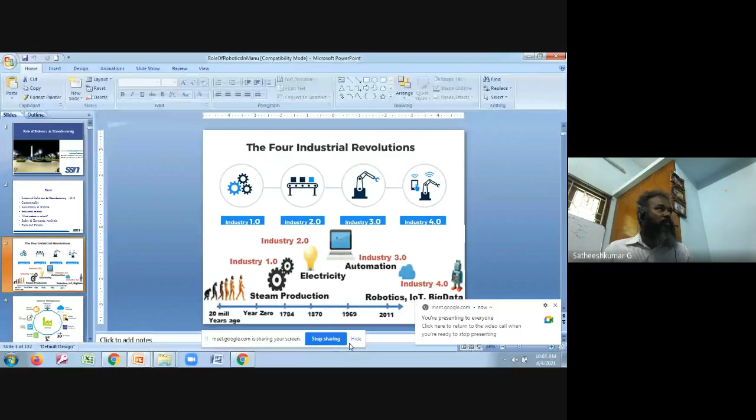Excuse me sir, the screen is not shared, sir. Your screen - is it? I thought I was already sharing. Fine then, share. So it says I cannot share. Just a moment, I'll stop sharing and restart my entire screen sharing. Share. Is my screen visible now? Yeah, it's rotating, sir. Yes, okay. How about now? Yeah, now it's okay, sir. Probably I'll just give it a second. Yes, now okay, sir. Press the hide toolbar button, sir. Press the hide button. Yep, okay, done.

So this is the picturesque location of SSN. Thank you, sir. So this is the flow: future of robotics and manufacturing with respect to Industry 4.0, current reality, automation and robotics, industrial robots, what makes a robot, safety and economic analysis, facts and fiction.

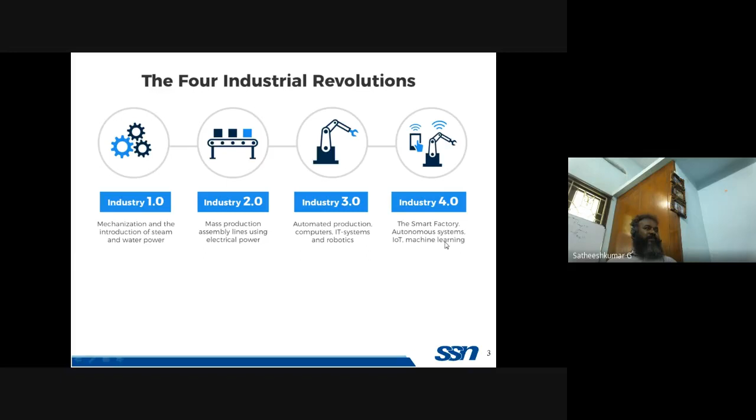Industry 4.0 is the fourth stage of the industrial revolution, which started approximately 200-300 years ago. Starting with steam power, then we moved on to electric power, then powered by electronics and computers, and now we are at the stage where the internet plays a role in everyone's survival. That is where Industry 4.0 comes in - IoT, robotics, big data are going to have a real showtime for these domains.

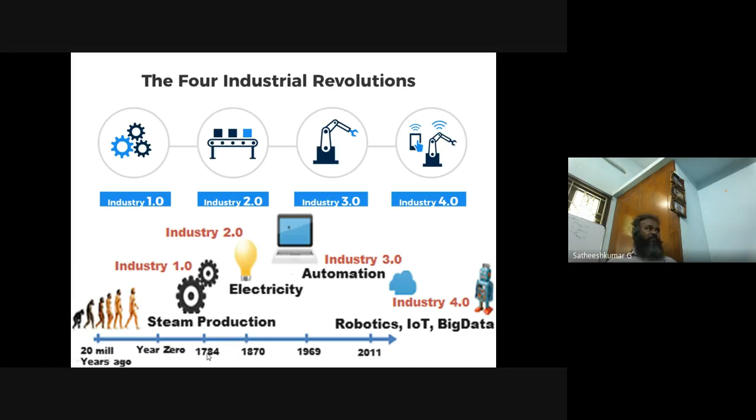It all started like this - it might even have started before that, but at least 1784 could be considered the starting point of the industrial revolution as it is, and it is extending further beyond now.

So there can be all kinds of robots. It is decided by the operating environment and the locomotion capability of the robot.

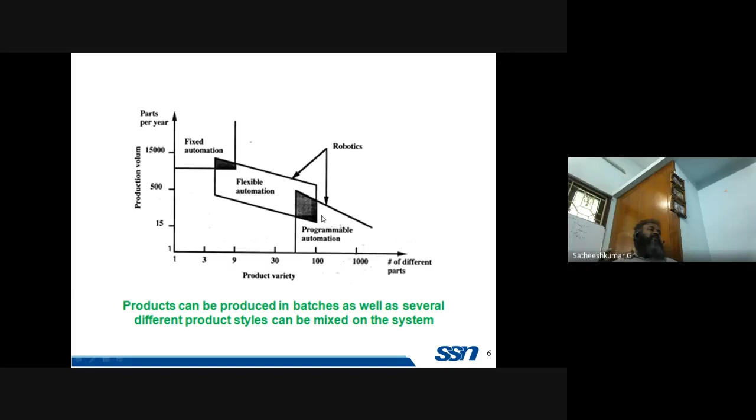So that is how it was, robotics was playing a role. And nowadays, this particular robots which played a role in these domains, called industrial robots, have almost reached a point where it is saturated. It can be called a saturation limit it has reached.

So this automation, the one that I presented in the earlier slide, will have a hierarchy. There will be a real-time application where you'll have controls at PLC level, field level, small machines and components working on its own. Then process level control will be there, plant level control will be there, and finally enterprise level control, ERP they say, right? On top, a complete company being run from one point.

So even PLC and SCADA will come and fit at this level. Sometimes an extension of that can fit at ERP level also, SAP and other things come at ERP level. So this is like one after other. If there is some failure here, this and this will be completely disconnected.

So instead, if you apply Industry 4.0 technologies, you will have a networked system of hierarchy. There is no hierarchy, in fact, everything is connected to the other. So this is like cyber physical system based automation, CPS based automation.

Cyber is like the virtual world of internet or through internet. It can be through any other way also. Cyber is like the virtual world, P is the physical world. So this physical world is converted into data representation and converted into a cyber physical environment.

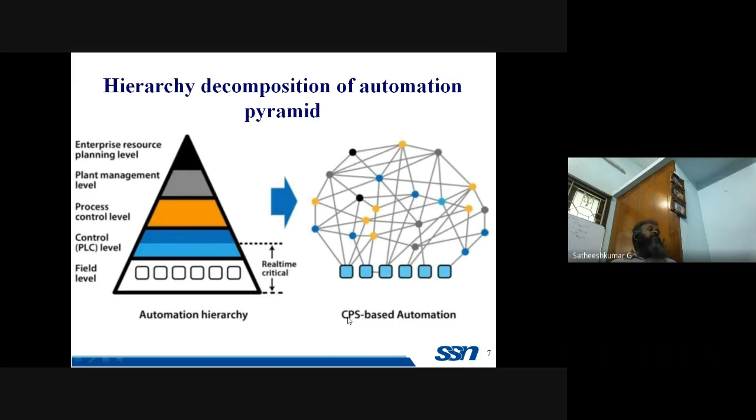If there is a machine that you have in your environment, for example, going to fabricate or work with a robot, all this working of the machine with the robot, everything will be transmitted and stored in the cloud. And all the information stored there, data stored there, will be the cyber physical system.

The machine might be working here, but equivalent to that, the cyber physical machine will be working in the cloud computing system. Physically it will be here, virtually that machine will exist there. That is how the technology has progressed. All the experiments that you wish to do here can be experimented there virtually. So you don't have to run the machine at all. Just by running the data, simulating the data, you will know whether this will work or not. Technology is developing to that stage.

Of course, it has not reached the zenith of Industry 4.0. We are right now at the starting point of Industry 4.0.

One more thing is IoT, Internet of Things. The definition of Internet of Things keeps upgrading every 2 to 3 years. For example, what is mass? That definition changed after some 200 years - after Newton and Einstein the definition of mass, they say it was relative, but still mass holds its own definition. But the definition of Internet of Things keeps upgrading every third year. That is the kind of change that we should be ready to sustain.

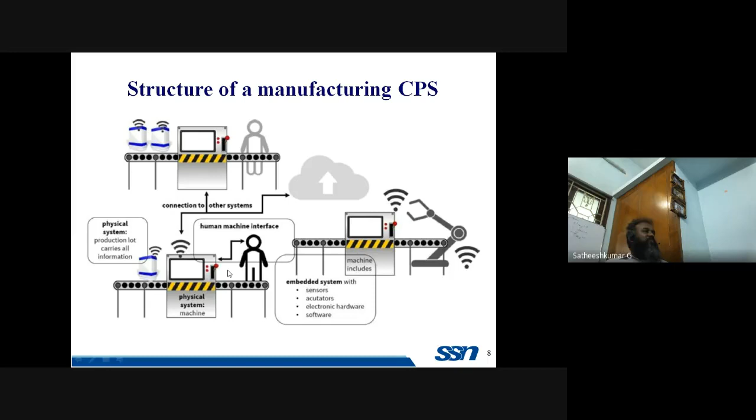That is like an embedded system. This is also a physical system - it is not like something out of the box. It's a physical system, but specific intelligence is there, some onboard intelligence. These other things need not have intelligence - this could be like some press button that you press and it is going to work, you switch it off and it is going to switch off. So all these things put together is the cyber physical system.

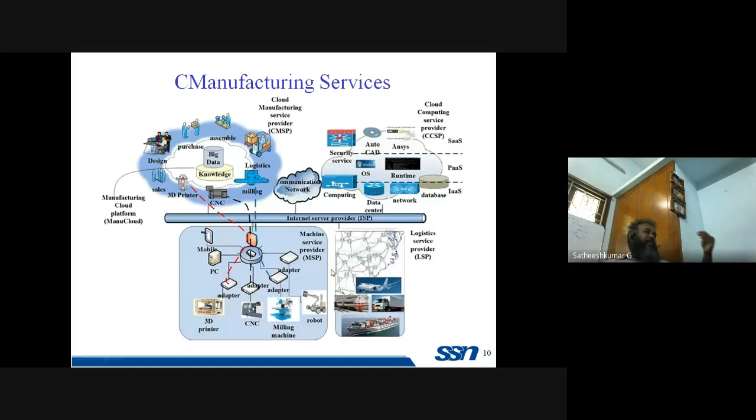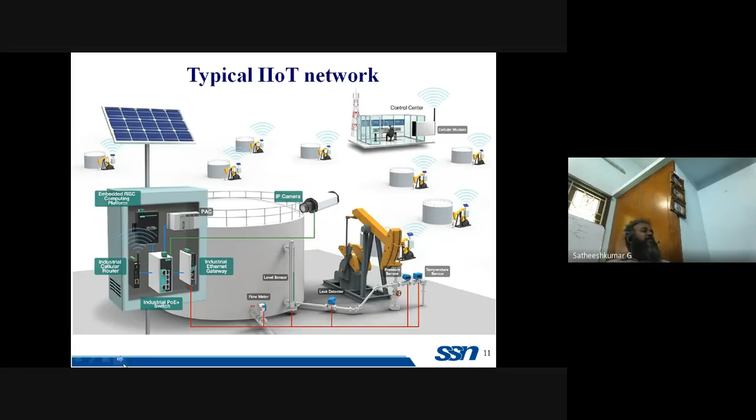Similarly, for a manufacturing company, you should have industrial communication among the components which are there. There could be a robot, an environmental controller controlling the air conditioning system, or a machine vision system that controls the motion of objects between different places and machines. And there is a CNC machine, a PLC is there to control all these things. All these things will be communicating to the cloud through the gateway.

And there could be edge computing also. Everything need not be done at the cloud. There can be some edge computing. Edge computing is like a pen drive I insert into my laptop, and whatever can be done at the cloud computing level up to a certain extent, I can do within the pen drive. It is not a pen drive, it has processing power. So such devices are called edge computing.

So this is like one small unit, a manufacturing unit. Virtually, in real time, this will be there. So this, again, with relation to cloud computing, becomes a cloud manufacturing unit at the smallest scale. Whatever I showed in the earlier slide is the largest scale.

And of course, what are all the research gaps for engineers to fill? Mechanical engineers, manufacturing engineers will be talking about FMS, which is a little advanced than CIM, computer integrated manufacturing. And even better will be reconfigurable manufacturing system. Automation assembly line was the starting point where we started seeing intelligence being applied.

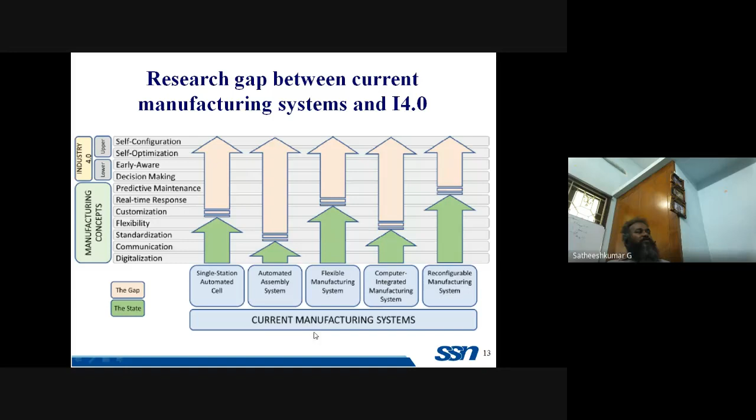So much is the research gap here if you have to reach Industry 4.0. So what are all the things that you have to cover? Self configuration, optimization, awareness, decision making, predictive maintenance, real-time response, all these things. Flexibility, of course, we got it into here and here, which was not there in CIM. So such gaps are also presented. This was also taken from the review paper, this particular slide as well.

So what are all the domains specific to simulation research? Simulation itself, like we knew CAD software, we simulate something. There are some simulation software where you create a cartoon and make it work.

Such kind of simulation for manufacturing applications is going to play a very wide, vast, in-depth role in the future. VR, virtual reality, AR, augmented reality, MR, and so all those things will have a very prominent role in the future.

For example, ergonomics will have proper simulation tools. There is a wide vacuum here. So many things can be created. Similarly, process design, verification, planning - so much can be contributed.

Of course, there are good softwares available for simulation, but to integrate, they are still developing. This is a very huge domain for individuals to work on. Say material flow, robotics, it is a very fertile field, product design. All these things will have simulation as one end of it.

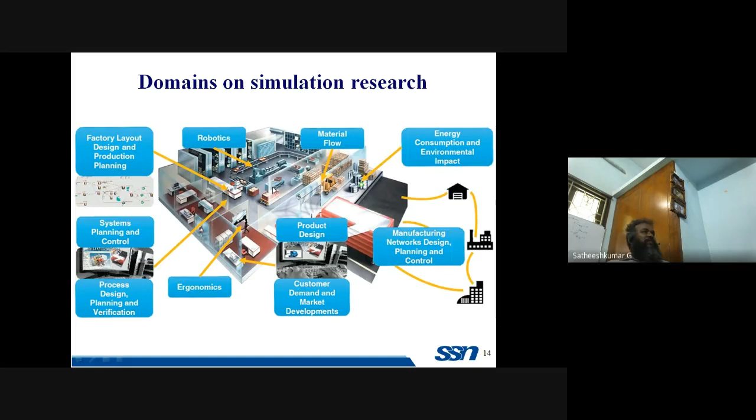You might say it is just energy consumption, man. Yes, I need a software because virtually I want to check before I start running the manufacturing unit. I want to virtually check by running this particular plant, what will be the energy consumption, what is the environmental impact, and so on and so forth. So this knowledge into these domains is very much needed, very, very much needed.

So specific to augmented reality, say you need something for training. If there is an AR developed for training, it will be helpful for job specific training, safety and security training. You can have expert level coaching. All these three domains, your life will be made easier if you have an augmented reality simulation.

And similarly for sales, you can have product display like in the form of a virtual twin. They say digital twin, right? So digital twin is like I have a computer or an Alexa like product, your mobile, there will be a digital equivalent of that. Every programming aspect, every usage aspect that I interact with my mobile, my digital twin, my mobile's digital twin will be able to replicate as it is in the form of say virtual motion.

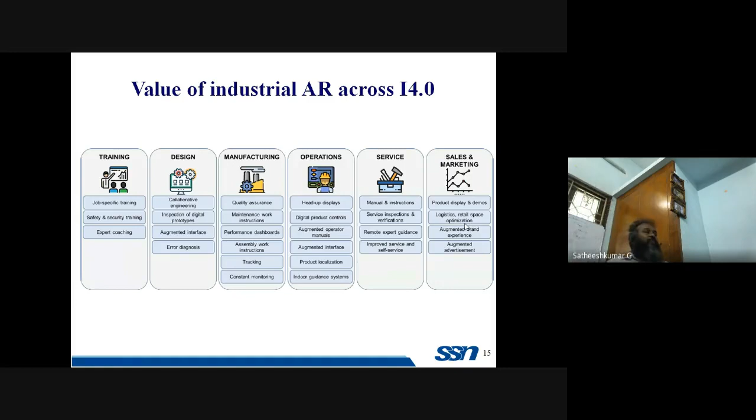So when I connect augmented reality to that, I will have an equivalent mobile, say on the hand. I can have two mobiles, one on my hand and one on my virtual augmented reality tool. Through my mobile or my laptop I can create one more mobile virtually. So such kind of things are possible.

I need not talk now, because the data that you generate is the lifeline for the cloud manufacturing unit or Industry 4.0. So data is the lifeline. If you remove data, everything will fall like a 9-pin. You won't have anything standing. Maybe our robots and machines might stand, but everything else will collapse to the ground. So data is the lifeline. They are going to present their data life cycle in this.

I think I've spoken a little more than 25 minutes, so I'll just move on. I just spoke about the future. This is how it might appear. Everything will be connected through the internet, everything will be connected through the internet. So this GIF is depicting that.

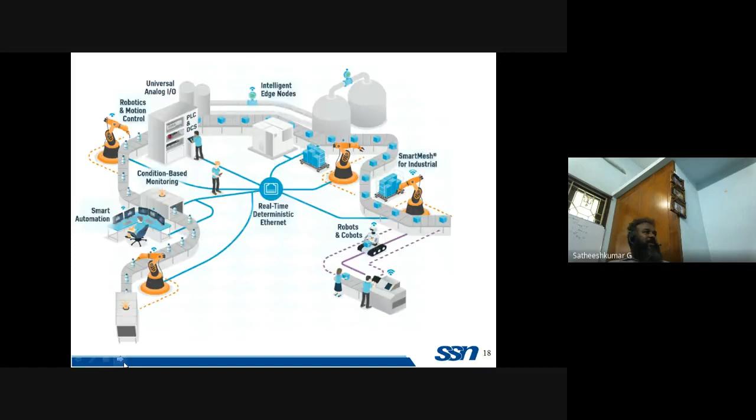Any guesses? Sir, connection, communication, and maybe all the data to be shared to cloud, etc. Okay, so let us assume, as you said rightly, since I've called it smart, even that communication is there - so between here and here, everything is connected.

Let us assume. What else is missing, Kana? Go one step ahead, what you said is right, that is the first thing. The people. Precisely, that is what I wanted to ask. So smart cities need smart people - if you have a smart city, you need the base, the foundation, as smart people.

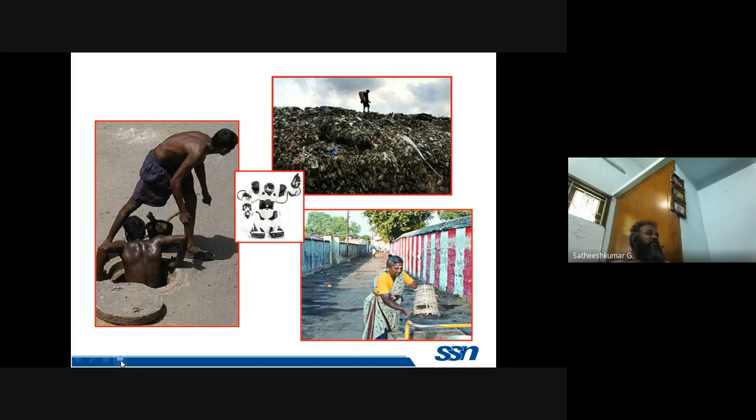So I say apply any technology - I'm talking about robotics, so apply robotics technologies to solve this problem. So technology, some people will say it is good, some people will say it is bad. We are all technologists, so we cannot say be on the other side, but nevertheless we will say technology is both good and bad. That at least we can say, right?

So all these things are helping me do that. We use this almost every day, right? All these things I use - watch, communication, mobile, buildings, such huge buildings, internet, computer, everything I keep using, electric power, bicycle, eyes, everything I use. So this is like a knife, a technology. I can use it to cut apples or poke it into someone else's eyes. So humans decide whether this is good or bad.

So what is this, Kana? What is this? Probably it might look too small for you guys. Can anyone by chance realize what this is? Okay, not a problem, I'll come back to it.

So which among these things came first - three things - stone or fire or wheel? Is it stone, sir? So it is stone, then fire, then wheels, and it's like a never-ending spiral of technologies we have been bombarded with.

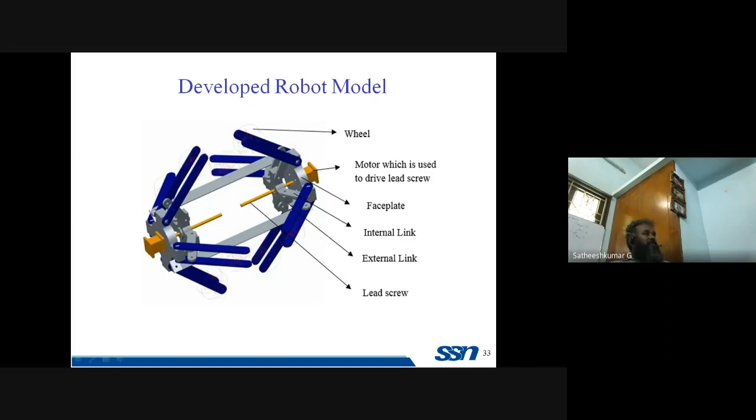There are places where 2.5 meter diameter pipelines are also there, but this is not meant for that. This is specific to Chennai pipelines, underground sewage pipelines. So this design, and all the software analysis that we did, I want to talk about.

Robotics and manufacturing, the role I'm supposed to talk about - that particular robot which plays a role in manufacturing, how it is designed, is what the next 2 or 3 slides will cover. So physically, I told you how I manufactured it.

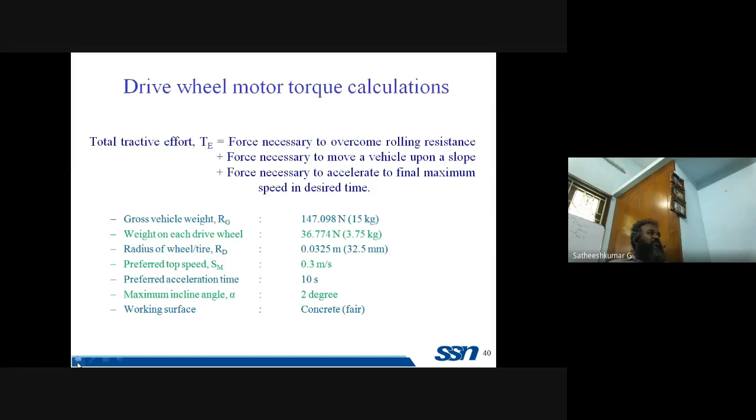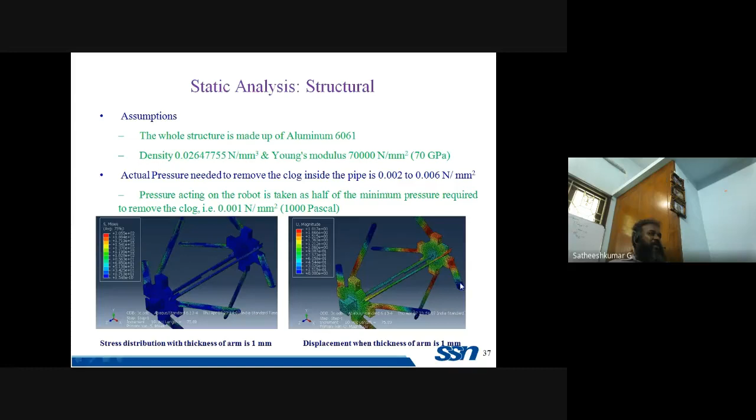I did some static load analysis, I saw stress, strain and displacement. I increased the thickness of this plate and measured again and again. That is the advantage these softwares give - structural analysis.

Having done that, I moved on to kinematic analysis. The robot is ready, so suppose if I want to move this particular wheel from here to here, what is the number of rotations that the motor I mount here will need, for this robot's end position to reach from here to here. Similarly here to here - there are 8 wheels on top on all the sides. For that I need kinematic analysis.

Kinematic analysis of the robot is to be done. For this industrial robot to move from here to here, I need to find the instantaneous position, given as X, Y and Z in space. That will be related to the joint positions - theta 1, theta 2, theta 3 - and this vertical axis also will rotate like this, so theta 4, 4 different rotations. When I combine them, I get a motion from here to here.

Such a complex mathematical model is running in the background, for one robot. For that, I'll be fixing these kinds of coordinates onto the end effector, onto the joints, because joints are the places where the motors will be fixed, the endpoints of the motors will be fixed.

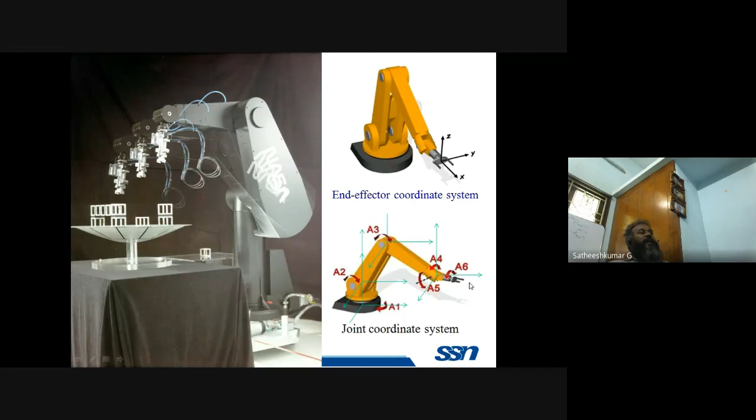So from here to here, what is the transformation? From here to here, what is the transformation? From this coordinate to this coordinate, what is the transformation? I'll find from one coordinate to the next, and so on and so forth, and finally I'll know from the base coordinate where the tool center point coordinate is. I can move it mathematically - that is the advantage of kinematics.

So within the robots I was talking about, the robot is not going to work alone. There will be a work environment where a work table is there, say an object is kept. So there is a coordinate system. The robot should know the object with respect to the table, this object with respect to the base, and this robot with respect to the world coordinate system. Now if one more robot is there, it should know that with respect to this room's corner point, I am here, and that other robot is here, so I'm not going to hit it. Such kind of complex relationship exists between these robots and the environment, and that has to be resolved for solving one robot's problem.

For example, say this robot, I can rotate it. I draw a line here and I can roll it, like I'm holding an object in my arm, rolling it, twisting it. But when I rotate it upwards, this entire arm rotates upwards, and I can roll it here too. But what happens is at the base also, this base was helping me roll it initially in a different, vertical direction. So that rolling was happening in one direction, and this rolling was happening in a different direction. But when I keep it in the same axis, both rolling motions get converted into one rolling motion.

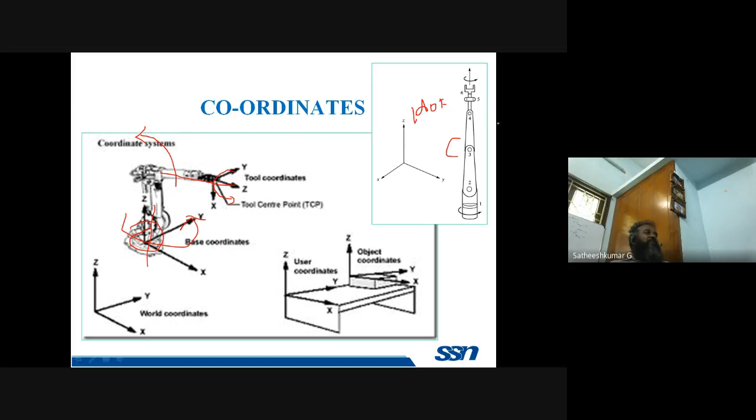So the robot loses 1 degree of freedom. What is the big deal about losing 1 degree of freedom? It might just be doing the same job, you might say, but mathematically, there will be a bomb dropped into the kinematic equation. The equation might be completely demolished, it will be confused, and your robot might start acting weird. It might go hit other things, hit the bottom, or throw whatever it is holding. Such is the complexity. This kind of losing or gaining 1 degree of freedom affects the robot kinematics, the working of a robot. That is called a singular configuration.

That also you can find out mathematically. An analysis called Jacobian analysis is there, with which you can predict, even before reaching the point, that if I go there, there will be a singular point waiting for me. So avoid that path, and your kinematics will take care of moving through a different path. That is the kind of analysis kinematic analysis gives.

For every robot in the industry, such kind of analysis is done, and that mathematics will be loaded in the controller. Here is the controller, a box which will have so many electronic components. For each motor you need a driver, and all those things will be fixed there, and power supply has to be converted. If it is an electric motor, it comes through this and comes here. If it is hydraulics, it comes through this and comes here. If it is pneumatic, accordingly different motor drivers will be placed here.

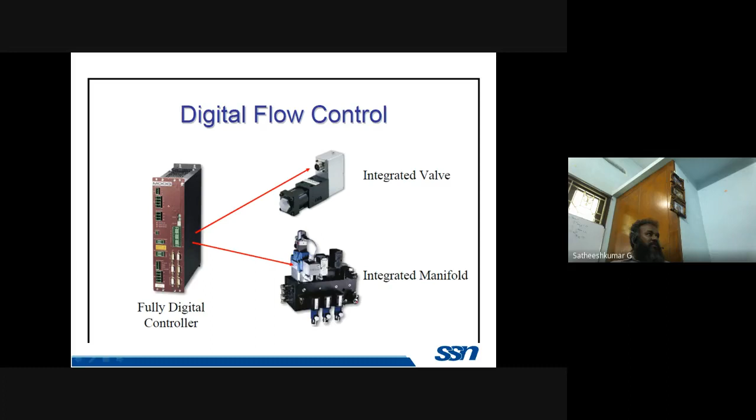And you have a teach pendant also to program a robot. So these kind of devices will be there in the control unit, for controlling, this is like a fully digital controller. These kind of components will be there inside, and for each motor such components will be there, stacked inside, one for each motor, and so on. There might be a number of sensors here that also will be controlled by this, and there will be other things like beep sound, light, and so on, all controlled here.

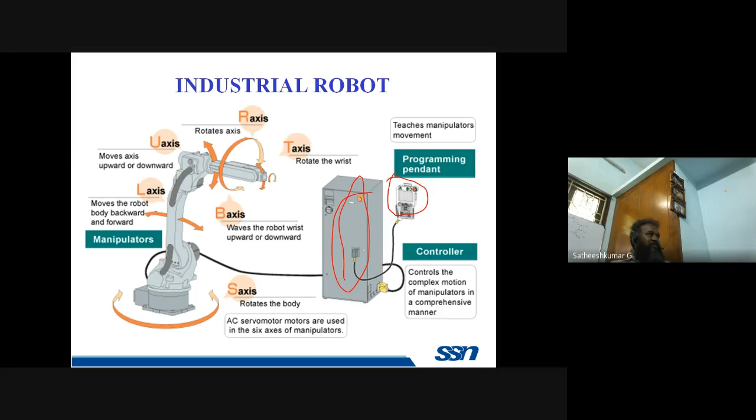That controller algorithm, the kinematics algorithm I mentioned, will be entered here, taking the kinematics algorithm. So suppose if I have a robot which has 1 wheel and 2 wheels, balancing on 2 wheels, it can tilt forward and backward.

Without falling, it should move forward and backward like an inverted pendulum. So if it is going to fall this way, I mount a sensor from the vertical to find out what the angle is, an inclinometer or some other angle measuring sensor. Based on that, I will say move the vehicle, move the wheels forward, that kind of algorithm will go here. If it is going backward, move the wheels backward, that is controller algorithm. Here, kinematics algorithm will be there. Kinematics is like if there is an arm like this, how much this side should move and how much this angle I should move.

Both the angles I should move to for this arm to move from here to here - that's where the kinematics algorithm comes in. I'll take feedback and do the error correction and control it. So this is what goes into a controller, all these things will go into a controller.

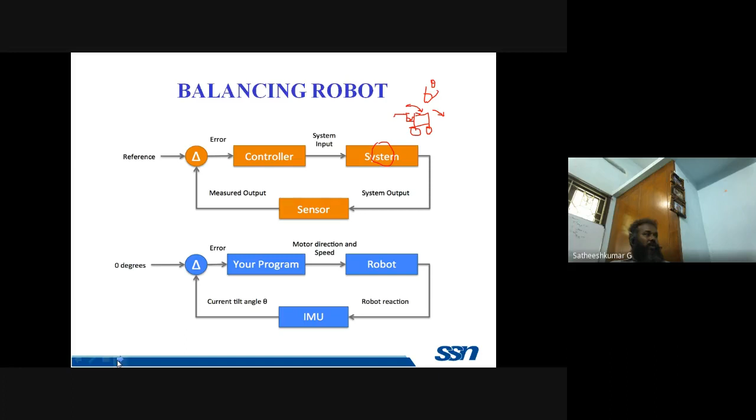So that way, different configurations of control architecture are possible. For my sewage cleaning robot, this was the control architecture. I cannot discuss any further on this.

It's 10:45. Okay, good. So we have gained some time now.

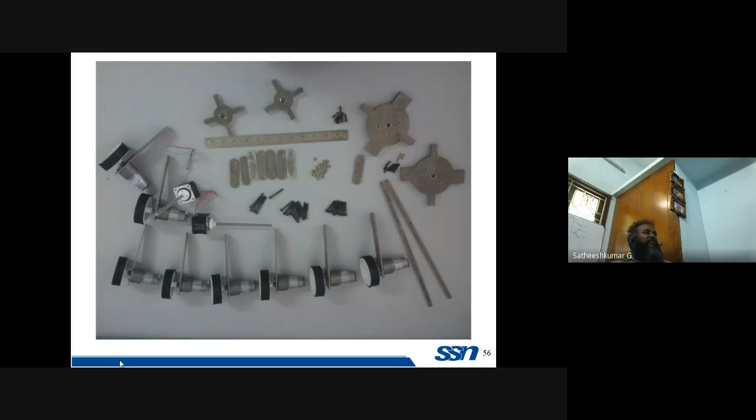So these are all the studies that we did and the fabricated components for that sewage cleaning robot, and the assembled one. The idea is, in Chennai there is some 7,000 kilometer network of sewage pipeline under the ground, under Chennai alone.

Can you guess what 7,000 kilometers means? 2,000 kilometers is approximately the distance between Chennai and Delhi. So there's a 7,000 kilometer network of sewage pipelines beneath Chennai alone - you can imagine for the entire country. And over 77,000 manholes are there within Chennai.

So assume these circles as manholes. This is Chennai, and manhole to manhole, pipelines are connected. What happens is, whenever there can be a clog in the manholes or in the pipelines...

For manholes, they know how to take it out easily. Humans generally should not enter - they use the bucket machine. They just loosen the bucket inside, grab the filth from inside and throw it out. That way, the entire manhole, which is like 6 meters deep, 2 meters wide, can be cleared.

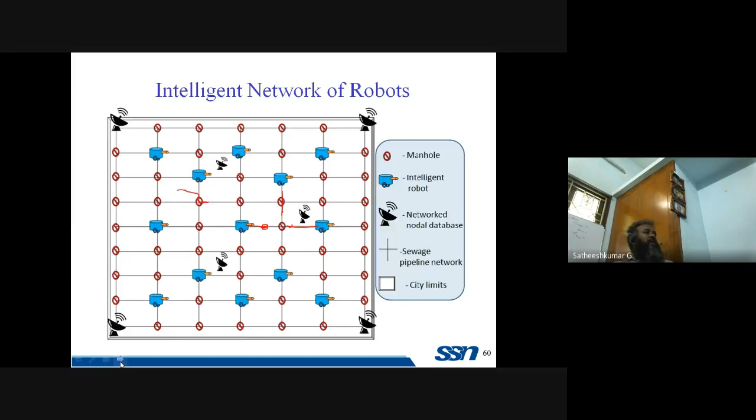And of course, there might be sensors mounted at these places, Internet of Things kind of sensors, which will also communicate to the robot - there is pressure developing here, come and check. So such kind of thing is what we are aiming at. We got funding from DST for some 40 lakhs, and we are working on developing a complete system.

So why - that is the question we should always answer. That is what education should do. So why robotics? I gave you the slide as an answer - the first slide which I mentioned.

And what is mechatronics? How are they different? Both are intelligent systems. What is the difference? Mechatronics and robotics are almost the same.

They are interdisciplinary subjects. How are they different? And what is this automation? How is it different? How are these three things different?

Okay, so mechatronics - let us say I create a device which will open and close my door. Here is my door. When I come and stand here in front of it, some sensor is there. It senses my arrival and just opens the door, then closes it. Only one arm is there, one small link is there. It just opens and closes, so that I need not call it a robot.

Okay, if I make a humanoid robot, and this robot walks and opens the door every time I come, every time I roll, then that is a robot.

Or if I take a complete arm and I'm fixing it to the wall, and using that to open and close, then it becomes partially a mechatronics project and partially a robotic project. Otherwise, everything is one and the same.

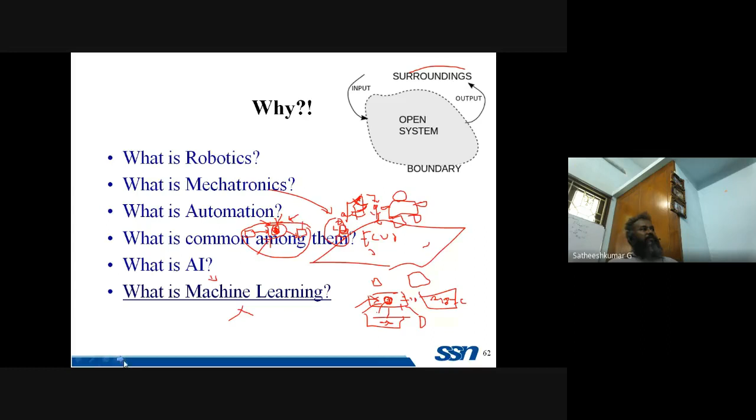Whoever is interested, you should start learning. It's better you start learning. It will be interesting once you know some basic C programming. You can learn Arduino programming also. You can control Pi and other softwares, and you can learn about artificial intelligence also. There are so many courses, free courses available, on NPTEL and so on. You can learn, or on the internet also. So you should learn, better to learn.

So all these things are examples for, say, a valve in the heart, your automated water vending machine, say valve in the heart. All those things are examples for mechatronics.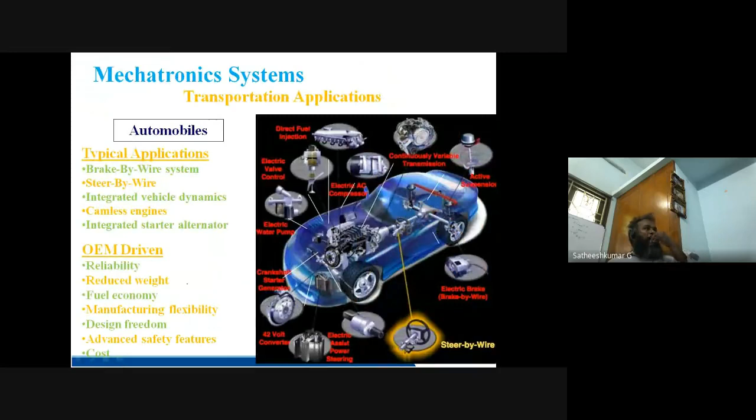So these cars I told you already, I gave this as an example. This is just one standard example which I keep giving. These are the components. Mirror opening and closing, there is a motor here. Window up and down motor is there, there is a button for that. Kick lock is there, locking this door. All those things are there. How am I connecting this wire?

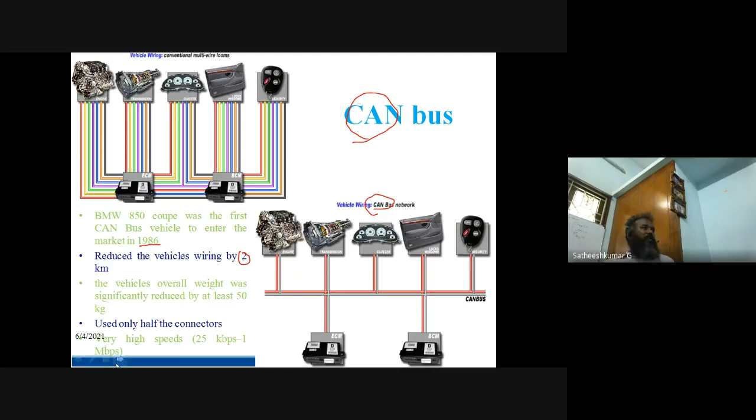That is done by some CAN bus controller, CAN bus protocol. So two protocols are there: this is like a conventional multi-wire protocol, and this is CAN bus protocol. All the same system connected, just by adopting CAN bus protocol in a particular car, BMW 850 Coupe, in 1986, the total wiring distance was reduced by 2 kilometers in each car, leading to 50 kilogram reduction in each car. So such is the advantage these kind of technology brings in.

Human beings, we are supposed to correct for 3 hours, some 25 sheets or 20 sheets. So when I reach somewhere around the 18th paper, my eyes will be almost half closed. I have to relax and come back to finish the rest. But these AIs and robots, they'll be working for years together, no rest, only mechanical wear and tear or some maintenance work. So these people gain advantage.

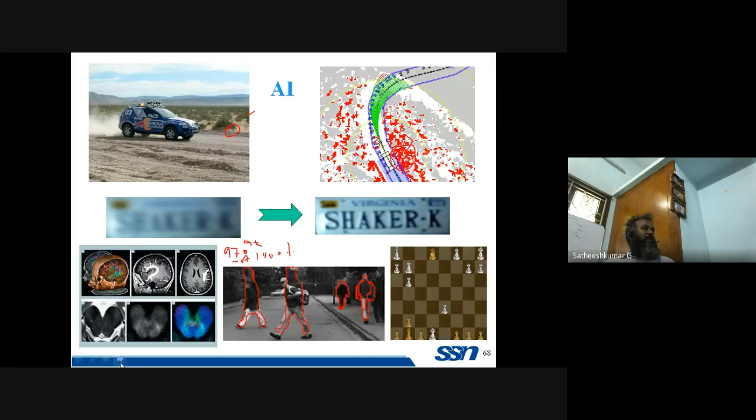Together they are getting 100. Man and AI working together. So what is the time? It's 11, half an hour more is there. Probably I'll just go through.

This is like you might have read it, Laws of Robotics, created by Isaac Asimov. He is considered to be the father of robotics by some researchers. In his collection of short stories, I, Robot, he proposed something called laws of robots. 3 laws he proposed, and a 0th law was added later.

It says a robot should not injure humanity. Similarly, a robot should not injure a human. A robot should obey human beings - that is the second law. And a robot should protect its own existence.

So now the condition comes: if a human commands the robot to hurt another human, that is in conflict. It should not injure a human, but it is also saying it should obey the orders given by a human - there will be a conflict. In that case, it says such orders should not be in conflict with the higher order law. So if both conditions apply, the higher order law prevails.

If both conditions apply, there is humanity on one side and one human on the other side - whom should I save? Go for humanity, this one prevails. So such is the kind of precedence that they are giving.

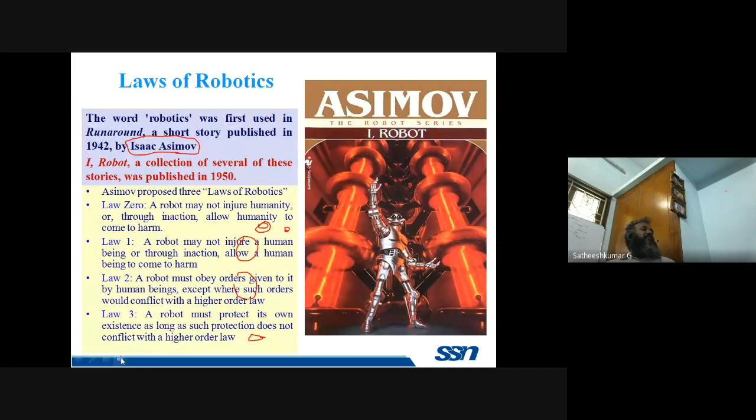So every robot, as I said, will have mechanical components, sensors, electronics, and the brain part also. Equivalent to motors, you have actuators in the robot. Equal to frames and links, you have the skeletal structure in human beings. Equal to sensors - suppose if you don't have a skeleton, can you assume your body shape? What will be the shape of your body?

Anyone can respond? Just wanted to hear it from you, how you guys think about it. If your skeletal system is not there, how will your body be? Our body won't be stiff - you'll be like an amoeba, a lumped mass of flesh.

If you had seen the movie Blob, B-L-O-B, it was a 1970s released movie, you can see such kind of things. It was a very interesting movie, in my childhood I've seen this. So think about like Aishwarya Rai or any model walking the ramp - if we had been created like this without a skeletal structure. Such is the importance of the skeletal structure that it offers for robots also.

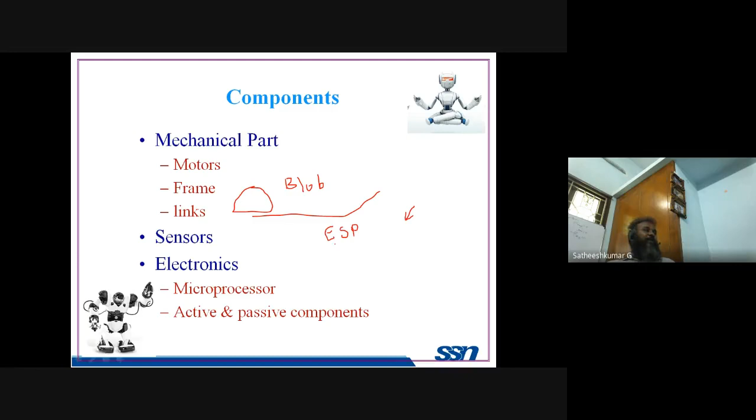Forget that - there are thousands and thousands of sensors available as an option for a robot. All the sensors you have to connect through electronics - resistor, capacitor, diodes and so on, transistors, so on and so forth. Even for running the motors, you need such kind of components.

The intelligence, you have to load it in the microcontroller and make it run. So there's microcontroller, microprocessor, supercomputer, and then PLCs, programmable logic controller, and even mainframes - all these things are equivalent to the brain. The microprocessor is there in your laptop, microwave oven, and washing machine.

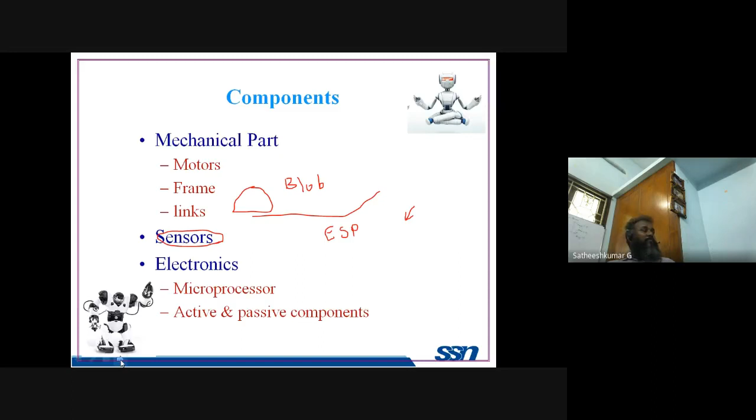Microprocessor is there in your laptop. Microcontroller is there in your microwave oven, washing machine, and so on. In your mobiles these days, it was microcontroller once. Now microprocessor is also taking its place.

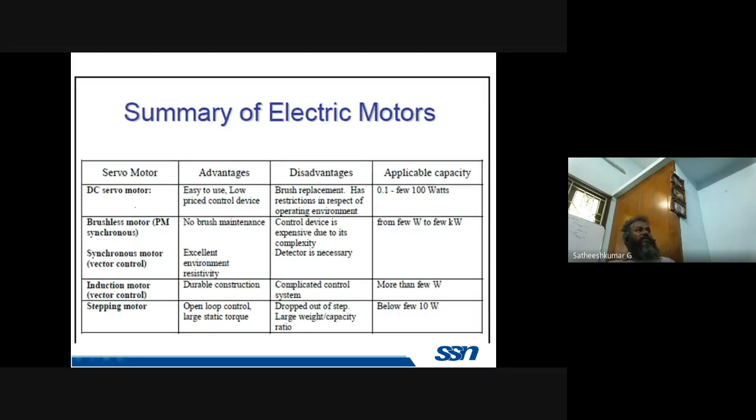So motors, probably I'll skip this part. Different types of motors are there. Electric motors are there, and pneumatic kind of actuations are possible, hydraulic kind of actuations. Long before, this was the scenario, most of the things were hydraulic.

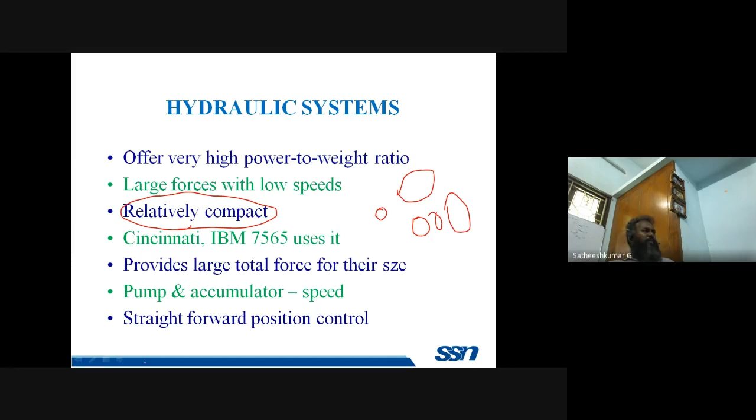Advantage with hydraulic is it will be very compact. If a large load is to be carried by a smaller motor, between hydraulic and electric motor, hydraulic will be much smaller compared to electric motor, and pneumatic will be a lot more, probably equivalent. So electric motor will be the largest, hydraulic the smallest for lifting a large load. Such high power to weight ratio is offered by hydraulic. Each will have its own advantage and disadvantage, and there will be a leaky environment.

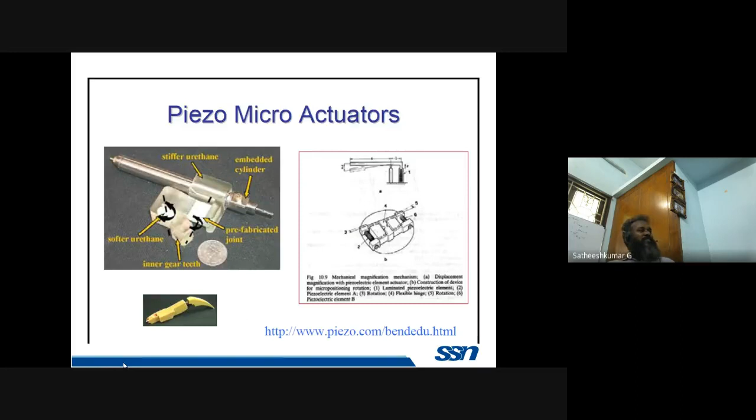So they brought both these things together, hydraulic, electro-hydraulic, and these days piezo, shape memory alloy, MEMS actuator, nano actuator, pico actuator, molecular actuator. I think then they might say electron level actuator, photon level, subatomic level. They'll keep going, there is no stop. String actuator, probably technology will go down that line. But as of now, we are here.

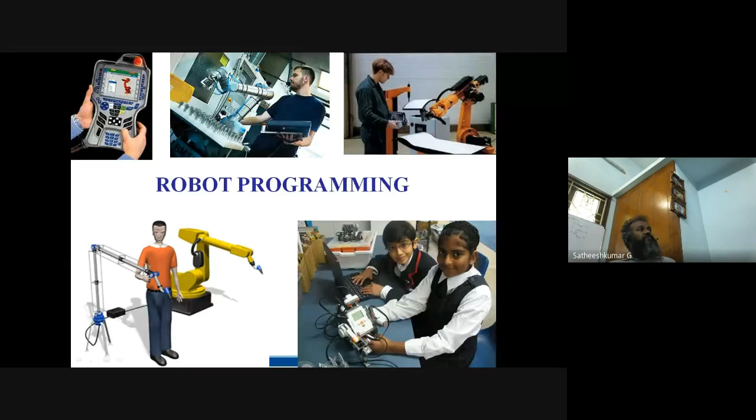Where robots are being used in the industry, manufacturing industry, and how they are programmed. Programming can be done by holding the robot like this. You can hold the robot, move it. If there is spray painting to be done, a painting to be done, you just move it with your own hand. You are an expert painter, so you know how to do it, and that will be automatically recorded.

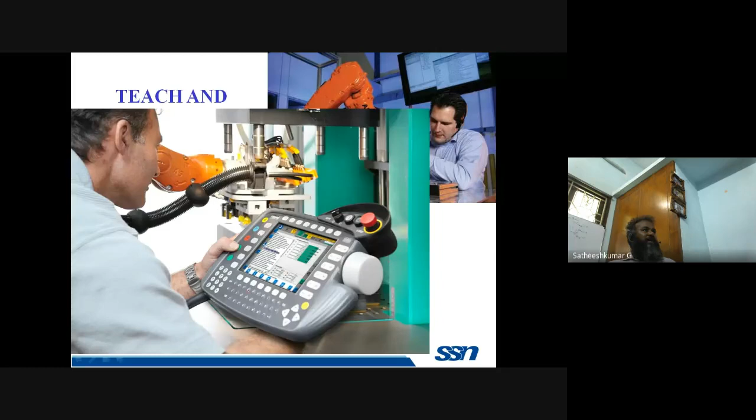Otherwise, you can even have a teach pendant, something like this, a button, a set of toggle switches and so on. With this you keep moving, and the robot will keep demonstrating as you move. So you want to move from here to here, you achieve that, and then save this program, run it 100 times. It will keep running from here to here. So this is teach pendant based programming.

There are computer softwares which are available. This is like a standard industry robot, ABB let us say. This ABB robot tool you can download from an internet library, and you can make changes here. Make it move from this point to this point, make a circle or a spiral, and that program will be saved. That program you can download directly into the real-time robot, and the robot will now start drawing a spiral trajectory.

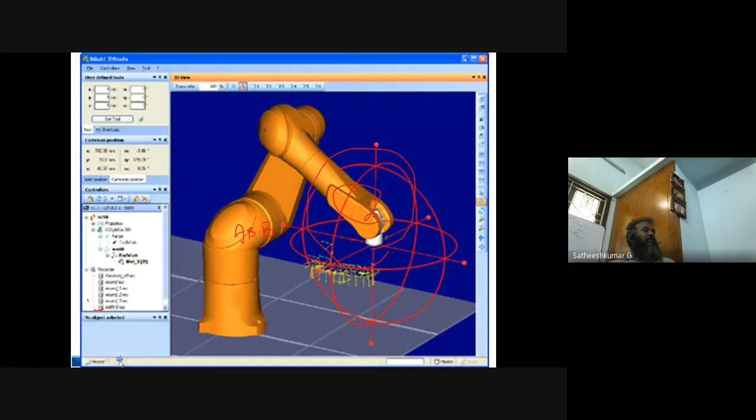These are called offline programming. All these things are possible for manufacturing applications. How about more than 2 robots? How about other machines working together in the industry? All those things are possible in offline programming and work cell simulations. So many very good tools are there. All these things can be put together and made to work in tandem.

In work cells, there will be proper sensors. If humans enter, it will be immediately sensed, and the robot will be switched off. There will be electrical fencing like this, you can see fencing here, and fencing here also. Neither the robot should cross this line, nor should a human cross this line when the robot is in operation. Such kind of advanced training is there.

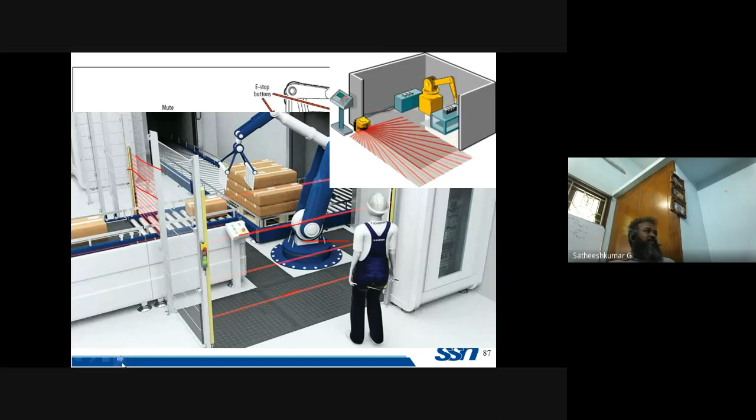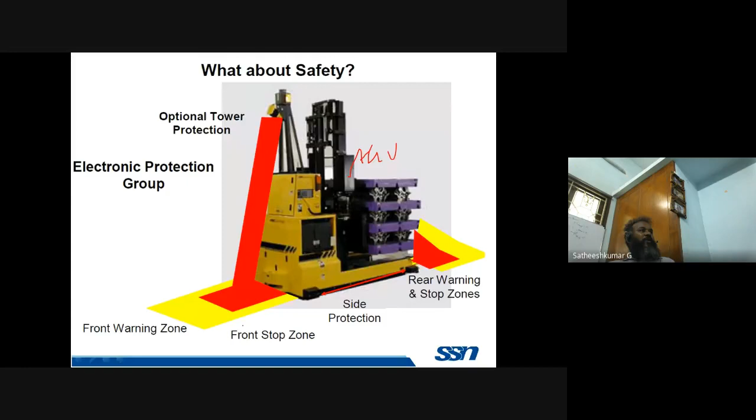Even for the individual units, AGV also has so many sensory parts on it. Front warning zone, rear warning zone, and there is a tower on top, a watch tower. Audible signal is there, flash signal is there, physical protective bar is also there, bumper-like thing is there, and all those things are coordinated on its own.

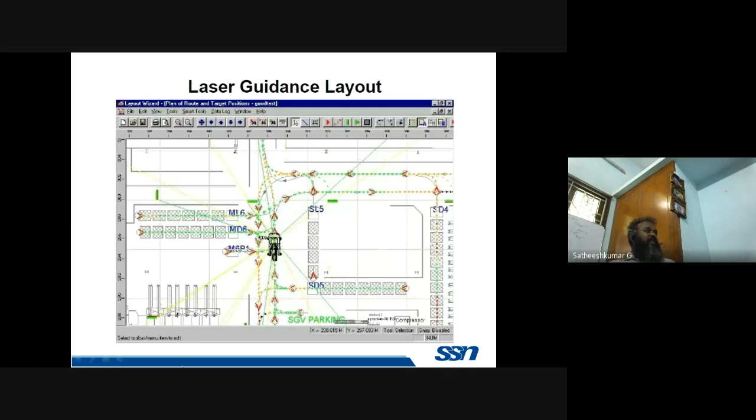There are even tools for guiding the path for the AGV within a huge industry, laser guidance layout. All these things are the trend. So moving on, what is it, cost analysis.

Cost analysis for any industry is going to be the same. If you're going to start a business, you need to do cost analysis. Say, here is the time I'm starting the company. Two years before, I would have initiated the process, started investing in so many different kinds of investments. For the first year, I'm going to operate the project. If you see the business revenue, initially I'm here, and I'm starting to make positive revenue, net annual cash flow. This dotted line represents the profit that I'm going to make.

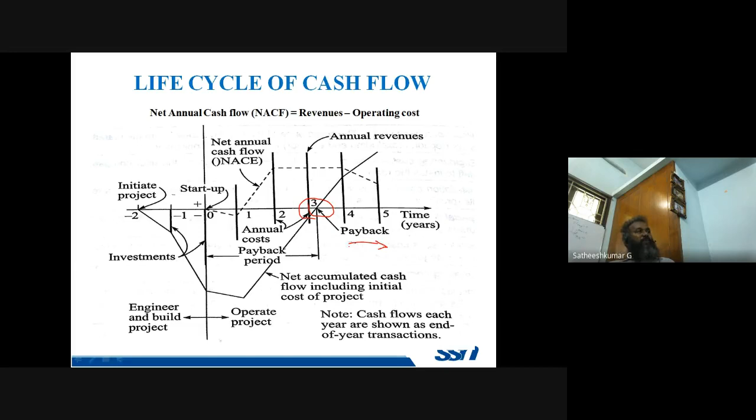From this, what I can find is that when you start the company, after 3 years, all the investment you have invested so far can be taken back. From this point onwards, it will be only profit. That is payback time. It is the same analysis that goes for any company. All these constraints you would have utilized to decide.

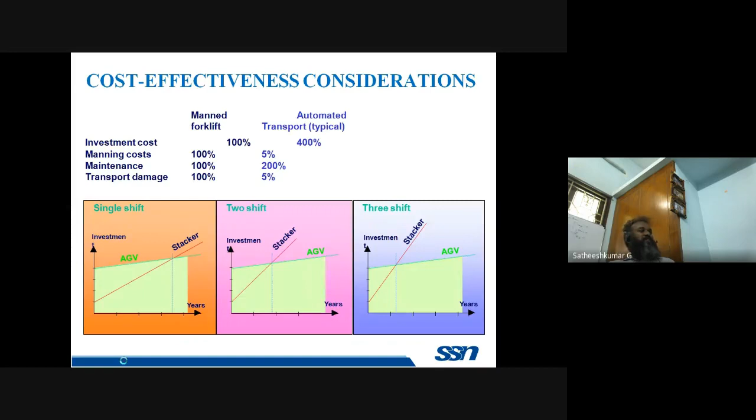So this is for AGV. Some of you might argue that if I'm taking all the jobs from human beings, won't we be jobless? Won't we be increasing unemployment?

Similarly, here it says human-robot collaboration is 85% more productive than humans alone or robots alone. If you go to Ford or Hyundai or any other automobile industry in Chennai or anywhere in our country, on one side humans will be working on the assembly line, on some other place robots will be working. Both will be inefficient when compared to humans and robots working together. That's what they say, 85% more productive. So this thing is called collaborative automation.

Those robots are called cobots. Cobots are more intelligent robots rather than industry robots, which are less intelligent, where humans can work in close proximity to the robots. They can work in very close proximity. Such intelligence has already been built into those robots.

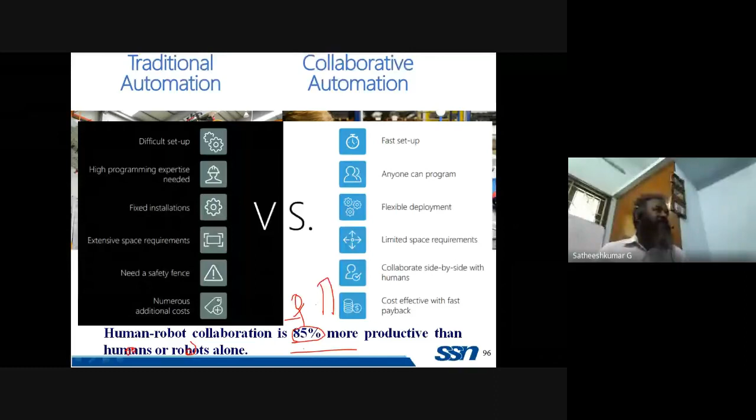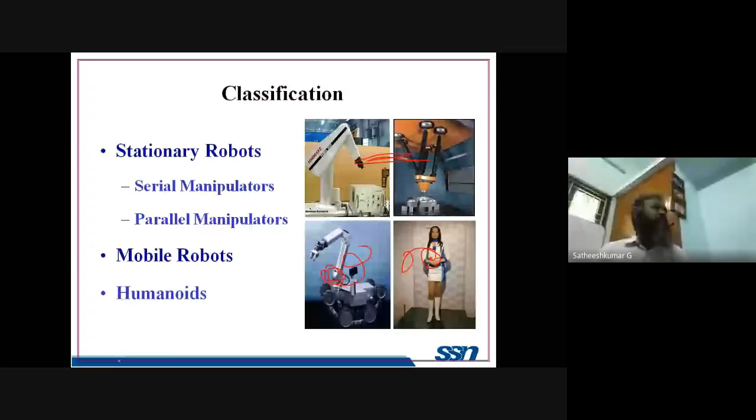So these robots, these are all industry humanoid kind of robots. Each has got its own role. These things I'm not going to talk about in detail. These are all the different types of humanoids.

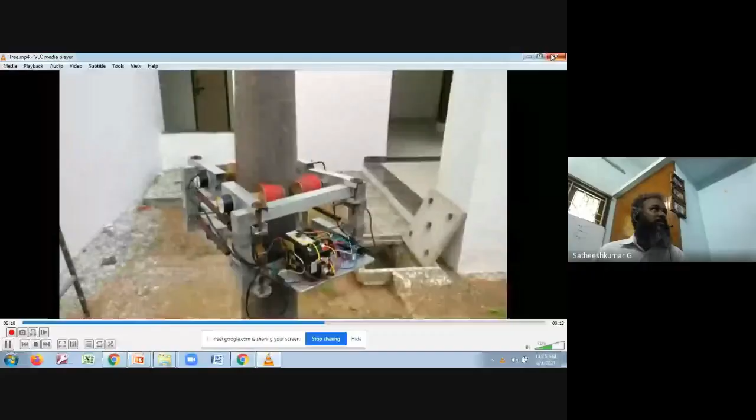Okay, how about now? Now it's good. Now it's good. Okay, I'll just play the other one. Yes sir, I'll just play the autonomous robot thing.

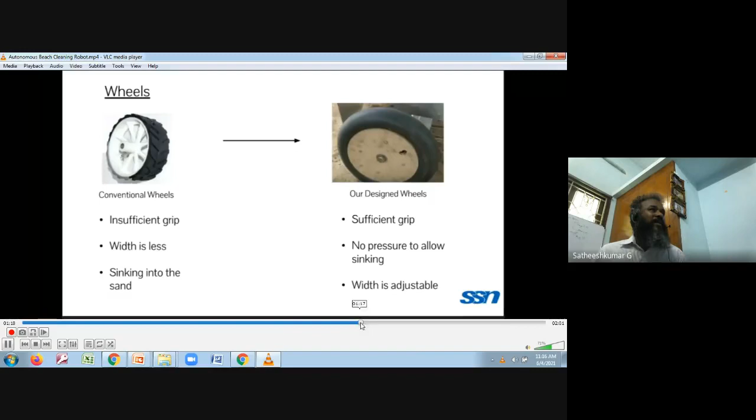Okay, this is like the wheel. These kind of wheels didn't work for them. It took a long time for them to understand. So they made such kind of wheel like a tube, over all the mechanical design, and they just used a mobile to capture the video. It's a very rudimentary design, not hi-fi, but something worth it. They did it.

What else did I want to show? Quite a few things, probably I'll come back and show. I'll just go back to my PPT. What else, beach and mosquito? I'll probably tell you what is a mosquito eradication robot. Is my screen visible again, the PPT?

Okay, I'll just give a glimpse about these things.

Mosquito is like this robot. It'll go around the house, stay at each corner for 1 or 2 minutes, and observe the sound generated by female mosquitoes. There is a difference between the frequencies for male and female, and it'll suck the mosquito in without killing it. The mosquitoes will be living inside the box.

We want to work on karma, like the SWAT and other things. You kill them, right? Each hit kills 1 or 2 mosquitoes. That is not done here. It dies on its own.

So here you can differentiate the schedule, like what kind of schedule you want to make it go around the house, and so on. How to attract the mosquitoes? CO2 is the means, created in an eco-friendly manner, and the mosquito comes and it captures it.

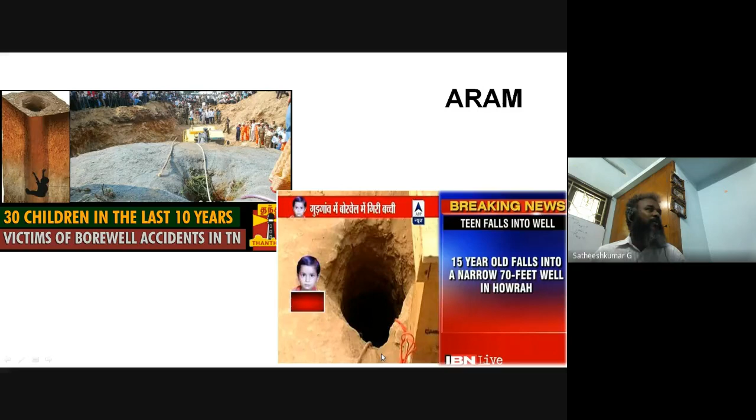How do I say, there are a number of problems in society. People falling into deep bore wells, they cannot be retrieved. Any attempt that they make, the mud will slip and fall inside. Just think about yourself stuck 70 feet down, with nobody to help you. Are we not supposed to help these kids?

I've seen a madam at IIT Madras. There was a road, and she was going front and back, not getting down to go to her department on a wheelchair. You would have read about her in your CBSE books also, from the chemistry department I suppose. I was asking her what happened, ma'am.

She said they had increased the thickness of the road, and she wasn't able to get down with the wheelchair. The thickness was just 1 inch, something I'd never even thought about. She was not able to get down, fearing that she might topple over that 1 inch. Such is the kind of difficulty they all face.

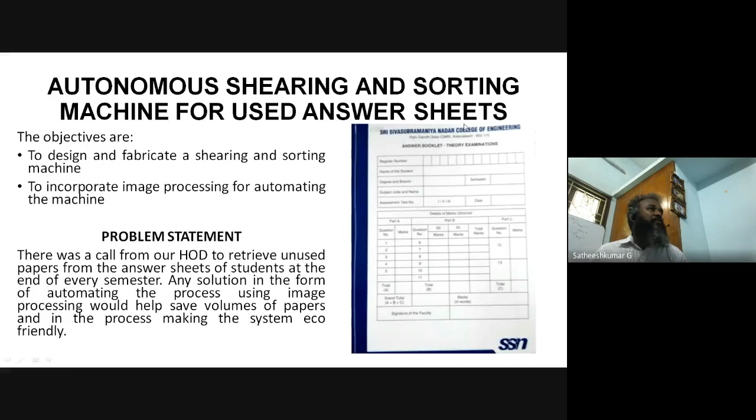We are supposed to think, interact with them, and find solutions for these kinds of people. Take these answer sheets, how many sheets go unanswered? You'll just throw it, recycle it, it gets recycled. I thought, what if I make a small machine which will tear out all the unused papers, that would be useful, right? Some small technology. So our students, they did it.

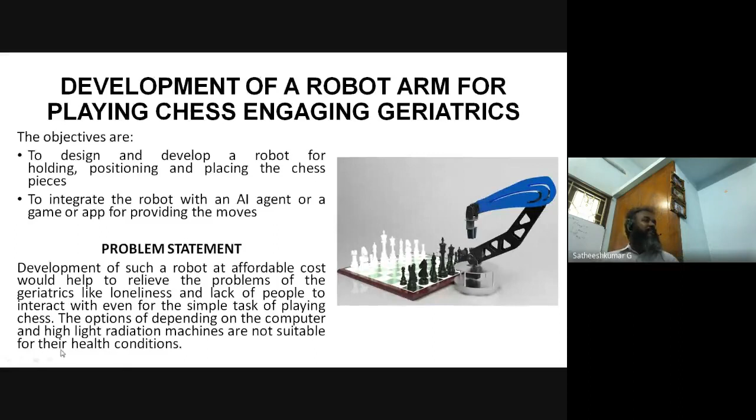Say if you're growing older, my father didn't have anyone to play with, he was always playing with the computer. So if I have a robot, it can at least give a feeling of some physical entity I'm playing with. Or if there's some other human being controlling it using Internet of Things, he can play with his friends, okay, geriatric people. Yes, this is much needed technology.

This SCARA arm, we made the construction using pipes which are available for electric pipelines in houses, and Arduino. So anyone can do it on their own. This is like some of the projects my students are doing.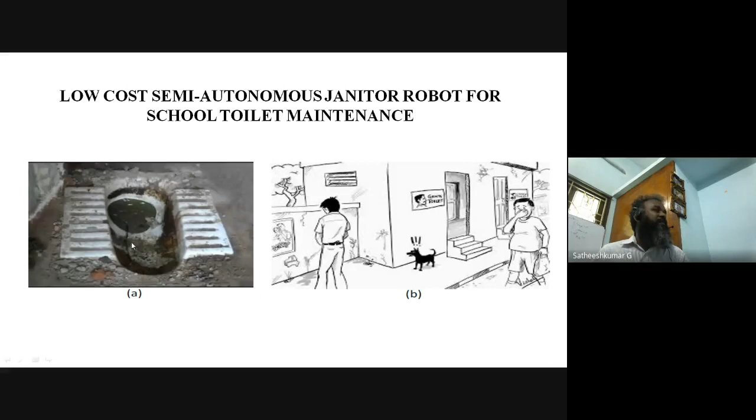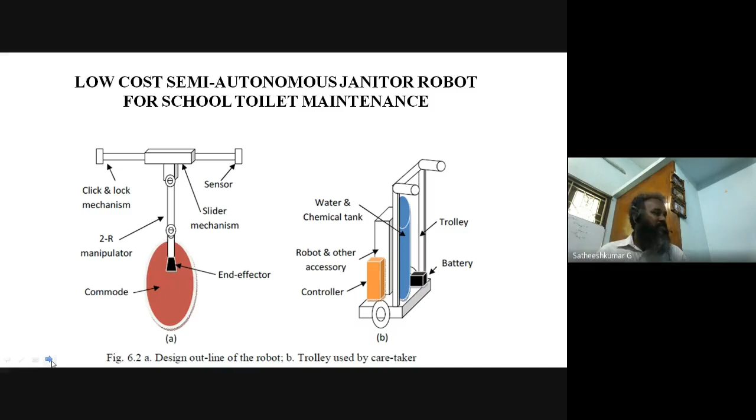The sanitation worker, if he is already ill, is affected by COVID, is he not a human being? Create some technology, make some robot which will clean this. What is so difficult in that? Say, let this be stuck to the wall on the left side and right side, and it keeps cleaning. This cannot take more than 1,000 or 2,000 rupees. All that is missing is we engineers are not contributing to the society, immediate society. That is the truth, so we have to accept that we are not doing it.

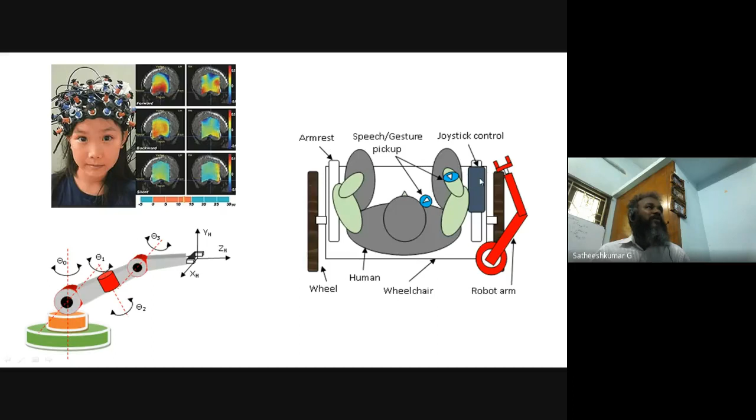So very recently, wheelchair users, if they are not able to use their hands, they'll use a joystick kept here, moving forward and backward. And there are people who cannot use the joystick also, but their wheelchair will have a joystick. What to do? Now we have developed a faculty in my college who developed voice to motion control, voice to signal conversion, and we created a mechanical component, signal to motion for the joystick. So if he says go forward, that joystick will be pushed forward, backward, and all those things we did.

The competitors came with toy cars, toy car motors - high speed motors. So the first race they won. The second race they had to slow down because of the maneuvers, so we were equal. When it came to lifting the weight, their speed was so much that the torque was too low - they could lift only 200 grams, 400 grams, 800 grams. Our robot could lift 5 kgs of weight. So much is the mechanical advantage you can get by working on the design aspects.

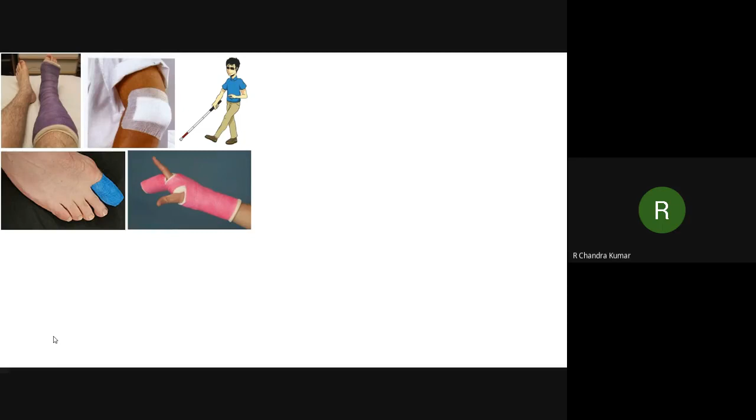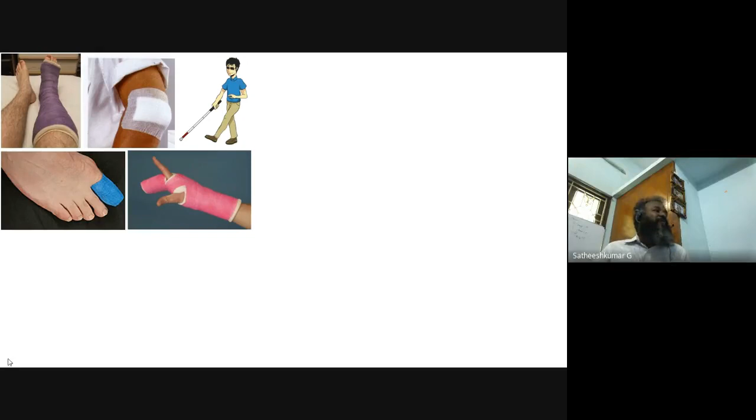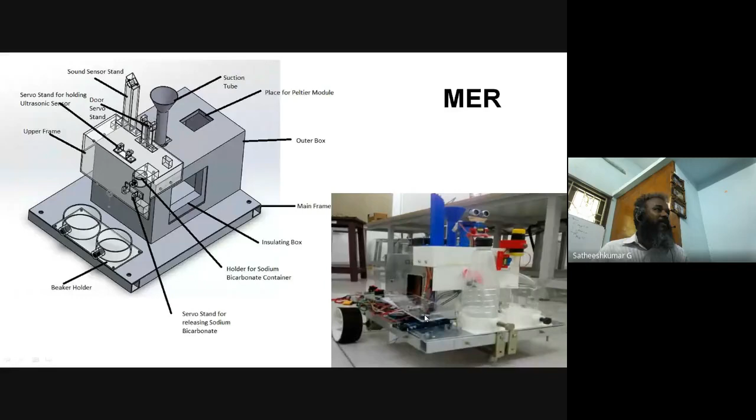Okay, this is the mosquito eradication robot, which we have filed for patent. And this is like a smart dustbin at the ground level. This will have intelligence. Corporations send sanitation workers to clean dustbins everywhere, but if the dustbins also have intelligence at the ground level, you can do wonders.

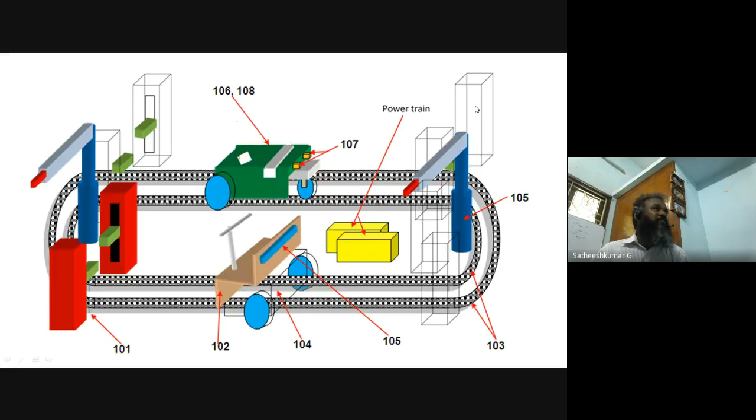This is the first patent that I filed, for crossing the road. At busy cross sections, accidents happen and vehicles have to stop and go. Instead, if people are brought down to this level and transferred to the other side in some 5 to 10 or 20 seconds, that is what this patent was all about.

Why should I patent? Take my friend, for example, a common scenario in Alappuzha, Kerala. People keep walking even if it rains, feeding the coir, so their legs and hands get hurt. So he made a machine where you can sit wherever you want, inside or outside the home, feed the coir, and the rope gets generated. He said everybody should get this free, he didn't want to file a patent.

But in 2 days he realized, what if somebody else files a patent? Then nobody can get it free, because whoever files the patent determines the price. So he immediately went and filed a patent for that. In IIT Madras, it was called the coir rope making machine.

And he also made an oil expeller. Companies making mixies and similar products were ready to pay 50 lakhs and more for that idea. There are some things coming now in the market, but not up to the efficiency that he was able to achieve for all the seeds he worked with.

Even now we are paying money for the bulb, that 100 watt, 60 watt bulb. Part of the royalty goes to the company owned by Edison, they say.

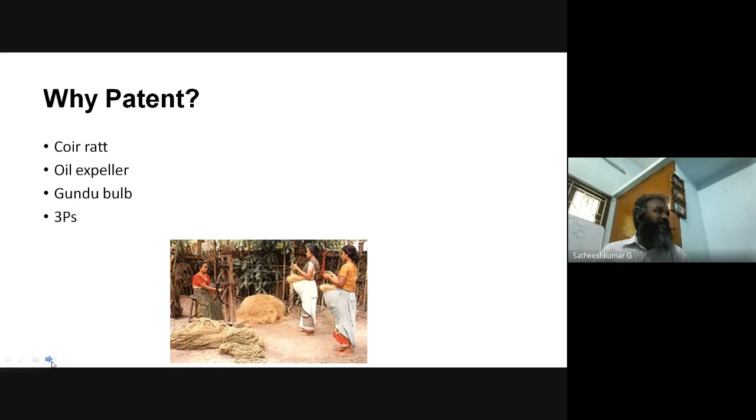These days, patents, publishing, and projects are the 3 P's you should really be worried about on your resume. In order to build your resume, do some projects, apply your knowledge, get it published, or at least file a patent. Once you have a patent, you can probably also incorporate a company and start building a company.

Even IITs and NITs have a very small number of patents, probably 100 or less. I'm not proud about it, and I'm not feeling bad about it either, but we are supposed to catch up.

China files 15 lakh patents. These other countries file around 6 lakh. India files around 50,000. Of those, granted patents are 4 lakh for China, 3 lakh for the others, and India has around 13,000 granted.

So there's a huge area where we have to improve. The number of patents filed by an individual can be 2,000 plus, per individual. It was Edison, with some 1,000 plus, until this guy took over. That is called intellectual property rights.

So if you want to file an intellectual property, file a patent, you can do it in 2 ways: provisional patent or complete patent. For a provisional patent, you download Form 1 and Form 2 from the internet, from this website. So if you just have an idea, today you got an idea, and you're afraid that tomorrow someone else might get the same idea and file it first.

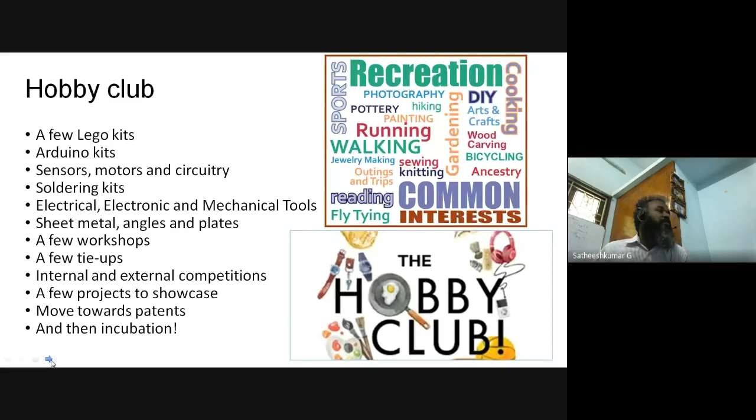Technology will help us fight any kind of war, even the COVID war. Biologically, they are fighting it, but we can also fight our own war towards education - we can use technology for fighting our own war.

That was it, sir, I think time is up. Is it all right? Shall I complete it now? Yes sir, yes sir, yes sir. You can, okay, finish it off.

I'm not going through these two slides - these are all the skills required. There are competitions run by the government too, not just this. Toycathon is specific to toys, creating intelligent toys. If you can apply the knowledge you learned with robotics to make such toys and include our culture - these days guns are a culture, right? All children play with guns, but is that our Indian culture? No. Let them play with guns too, but there are many other things we can pass down to children. So those things we have to create.

All the toys in the market are made by China or someone else, very few from India. By the look itself you can tell, okay this is from India - that is not fun at all, we should feel bad. Engineers are supposed to play our role, but we are playing the role of cribbing people.

We cry that roads are not good, government is not good, this facility is not there. We say my faculty is not teaching good, the infrastructure is not good in the college. Forget all those things - to overcome that is engineering.

Problems will be there - without problems, there is no country which has grown into a developed country. With all those problems, how did they learn their knowledge and apply it then and there? Today I learned about Varignon's theorem - how did I apply it for my society or a practical application? Unless you connect that, forget growth for India.